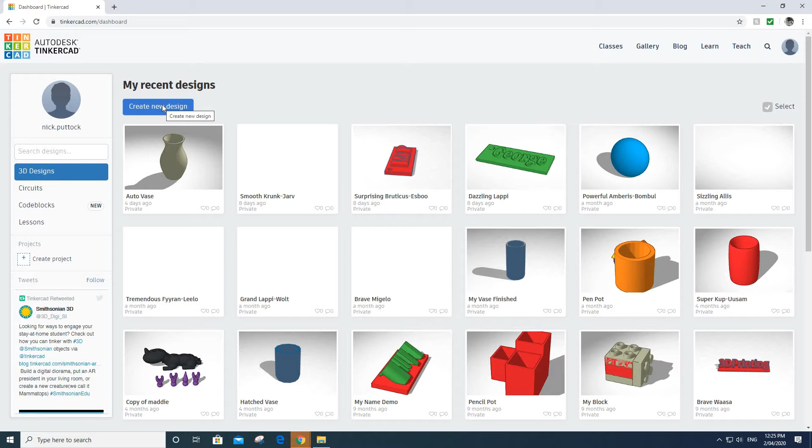So I'm going to start by clicking on create new design.

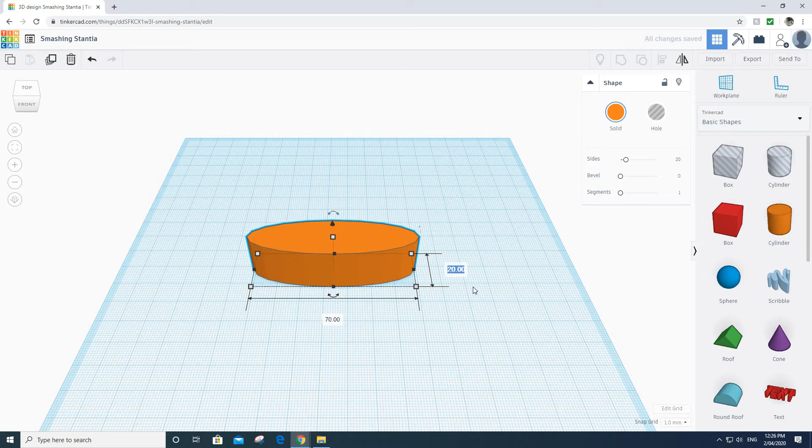Okay, so things get a little bit more tricky today. So what we're going to do is we're going to start by grabbing the cylinder and I'm going to tell it exactly how big I want it to be. So I want it to be 7 centimeters across, so that's 70 on here, 70 millimeters. It looks massive right now, but it'll look okay in a minute, and it'll be 70 that way as well. It's quite angular. Do you remember how we talked about our shapes looking quite angular? So what I'm going to do is I'm going to click up here and give it more sides.

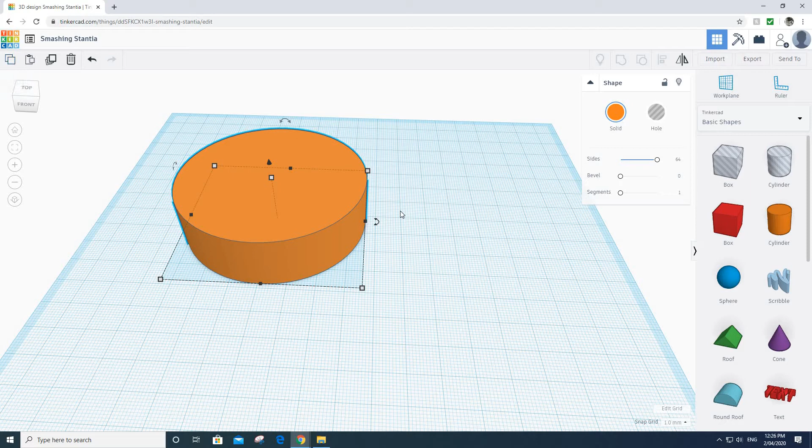Okay, so there it is. It's a little more round. And I'm actually going to use that shape a few times. I'm going to click on that one there, Copy. Okay, and now I can click on Paste, and it should make me an extra copy.

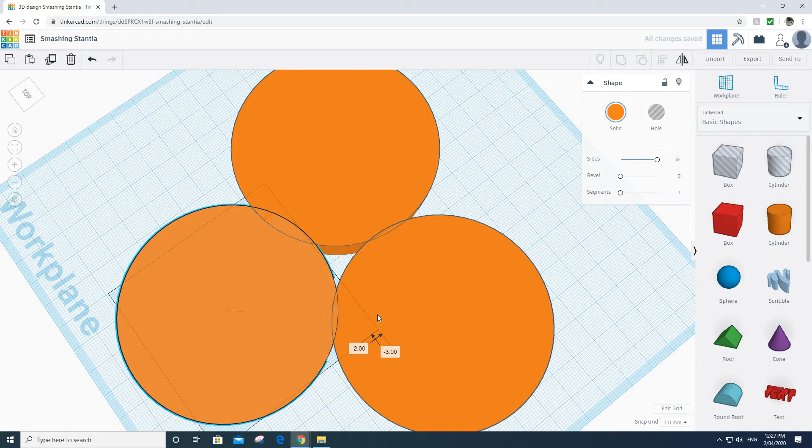Now I'm going to make 3 copies of that. And what I'm going to do is I'm going to make sure they touch, they intersect. I'm just going to do it by eye for now. I could measure it all out and everything, but I'm just going to make sure there's enough of these shapes touching each other that if it was to be printed, they wouldn't completely fall apart, and there should be a bit of a gap in the middle.

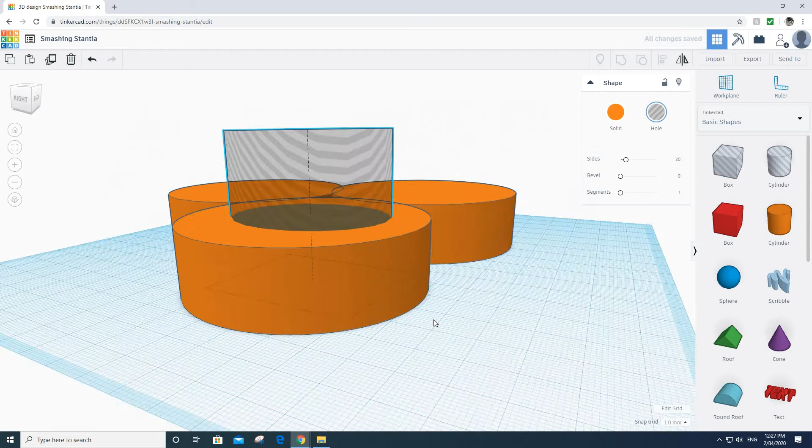And what I'm then going to do is I'm going to grab my air cylinder, so my hole, and make that first up. I'm going to make it a bit taller so we can see it more easily. I'm going to line that up with this cylinder here. I'm actually going to give it lots of sides as well, so it's nice and smooth on the inside. And I'm going to line it up.

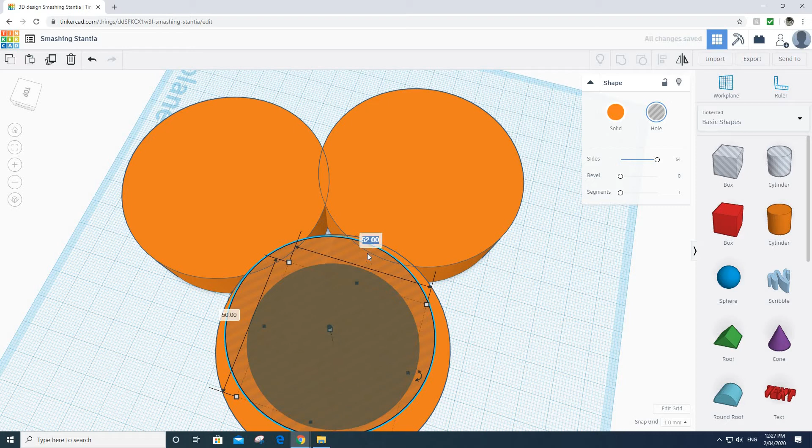So straight away I'm going to select this hole shape and just this circle, so select just those two. Oh, actually that circle is not very circular, is it? I should probably give it some dimensions first. So if it was 70 millimeters wide before, I'm going to make it 50 millimeters wide inside.

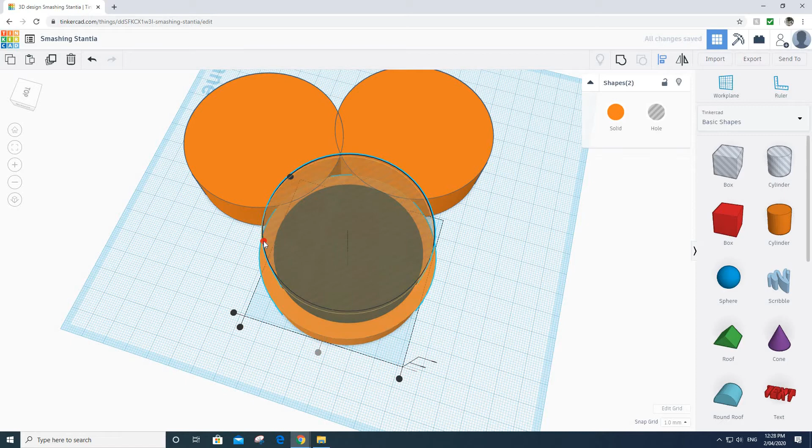Okay, so now what I'm going to do is I'm going to select those two things, and I'm going to align them. I'm going to align them to the center. So it's now put that hole exactly in the center of that circle. I don't want it wonky off to the side.

But the problem is with this, the actual hole is going to cut all the way through that orange circle there. Okay, so what I'm going to do is I'm actually going to have to click on the hole, click off it, and I'm going to click on the whole air space.

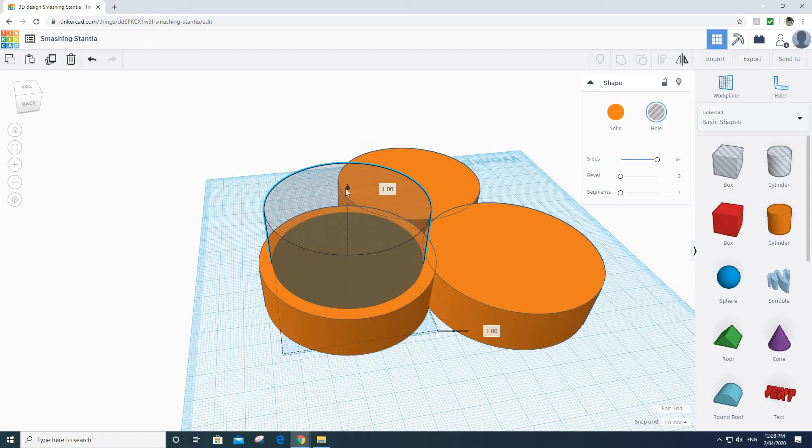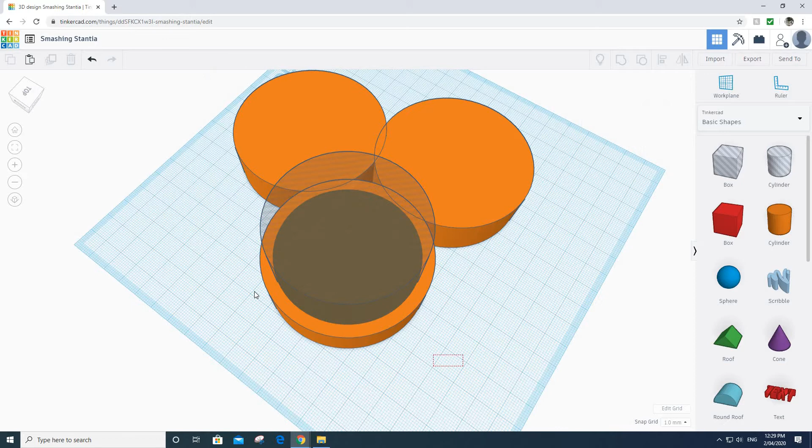I'm going to lift it up by 3 millimeters. That means it's now going to have maybe a 3 millimeter piece of plastic at the bottom of that hole. So it's not going to cut all the way through. It's going to leave like a section, this bit here at the bottom, so that my pencils don't fall all the way through. So I'm actually going to go ahead straight away now and group those two things together. Group, and it just sometimes takes a minute, but it's going to cut that out.

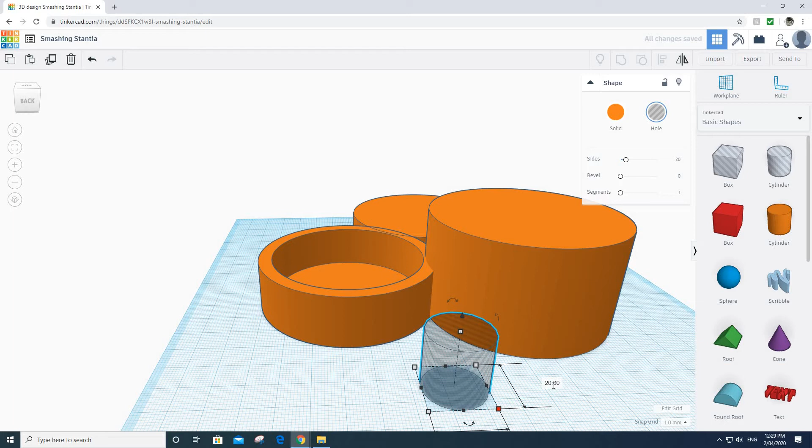Alright, next. This time I'm going to actually make, how tall was this? We said that was 20. I'm going to make this one 40 tall, so it's going to be higher on this one. And then I'm going to get my cylinder again, and we decided before that it was going to be 60 millimeters wide, 60 millimeters long, and obviously it can be as tall as I like.

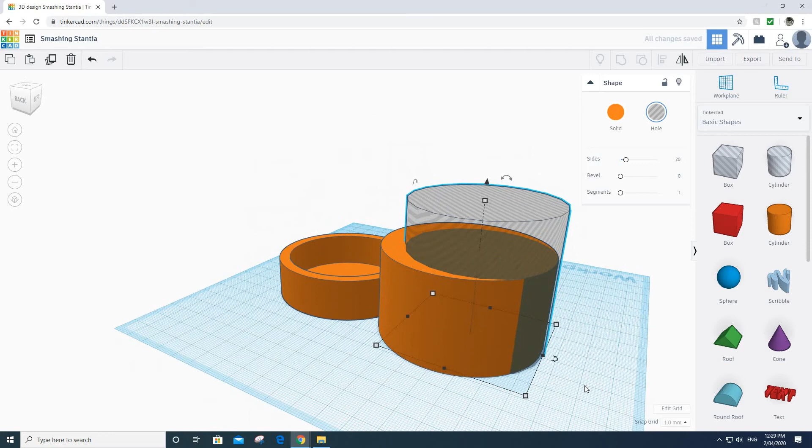It can be as tall as I want it to be. I just have to make sure that it's touching the build plate, otherwise it's going to mess it up for me. I'm going to put it kind of roughly in the middle of the next one. It doesn't matter - look, if I put it over here by accident off to the side, it doesn't really matter, because what I can do is I select them both, I click Align, and it will automatically line them up for me. Okay, so it's done that.

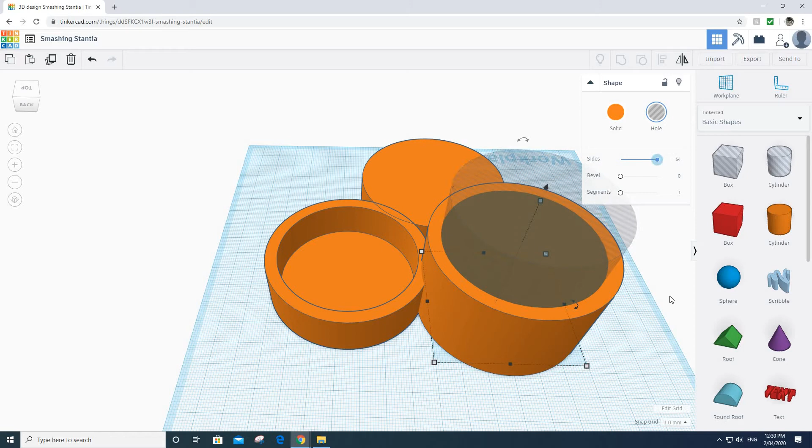This hole looks like it might be a bit angular, so I'm going to select the hole and make that 64 sides, which should smooth it out a little on the inside. But if I'm not careful, you see this funny greyed area, which means my hole that I cut is going to go all the way through.

The last one I lifted up by 3 mils, so I'm going to do that again. Look, I lifted it up, and now it's 3 mils. The gap at the bottom is 3 millimeters. Okay, click those two — don't click everything, because that's going to group them all together, and I don't want to do that yet.

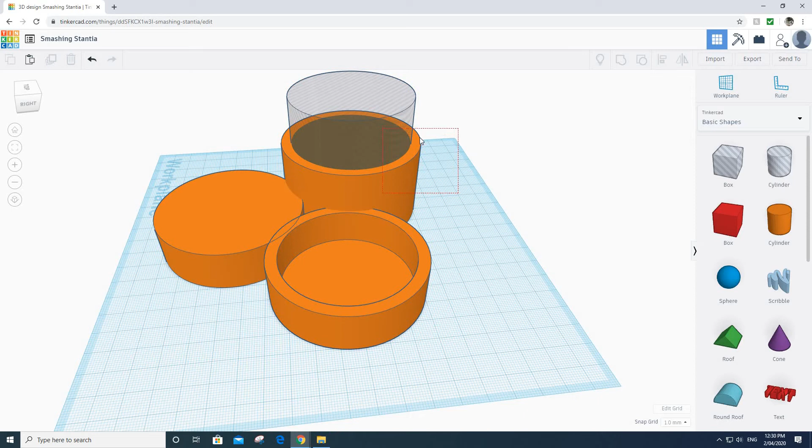I'm just going to click those two and click on group. That one's built. The next thing I'm going to do is click on this one. That one was 20 millimeters high, which is 2 centimeters, not really high. This one was 4 centimeters high, and this one I'm going to make...

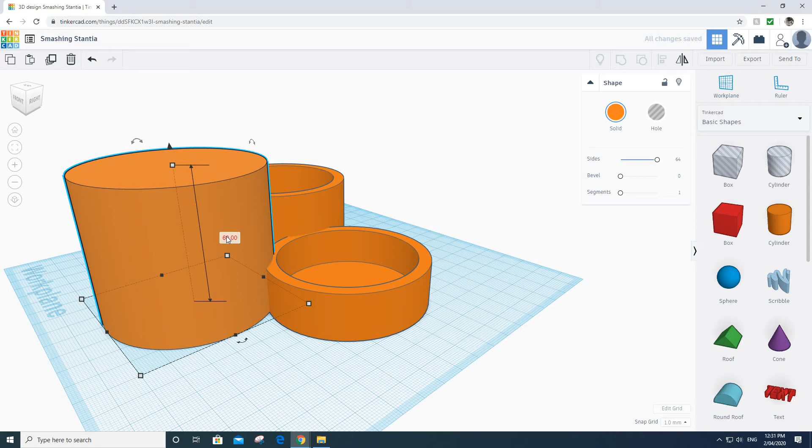I'm just going to undo that — that's my mistake. Click on the white one there to lift up the height of your shape. This one I'm going to make 60. I can either drag it like this and watch the numbers go up to 60, there it is, or I can click in that box and just type 60. It depends what's going to work for you.

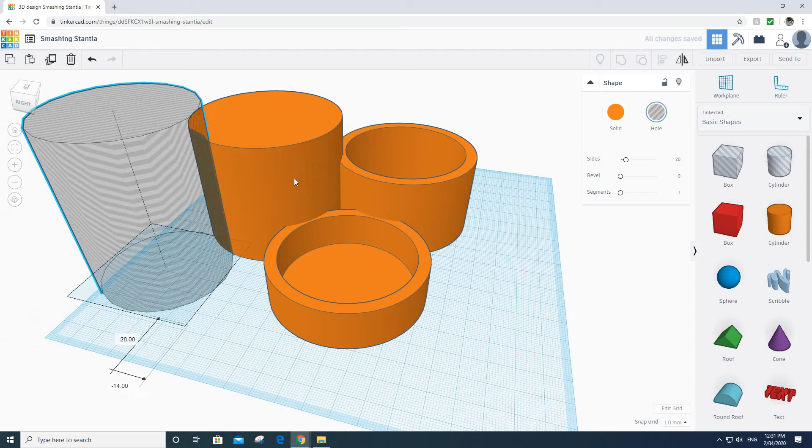Again, last one, I'm going to make my cylinder 60 wide, 60 long, and I'm going to make it really tall — at least 60 tall so that it sticks out the top. Otherwise, there's not going to be an opening at the top of the pencil pot.

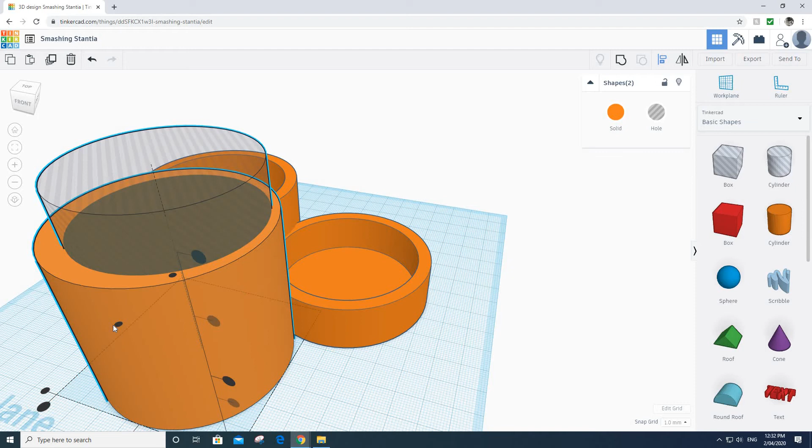Now, just while I remember, I'm going to make all the sides really smooth, and I'm going to align those two shapes to each other. So there's both of them selected — that was just done with a click and a drag for those two shapes, the hole and this taller cylinder. Now I'm going to click on align, which aligns that one and that one. Then I should be able to just group those two together.

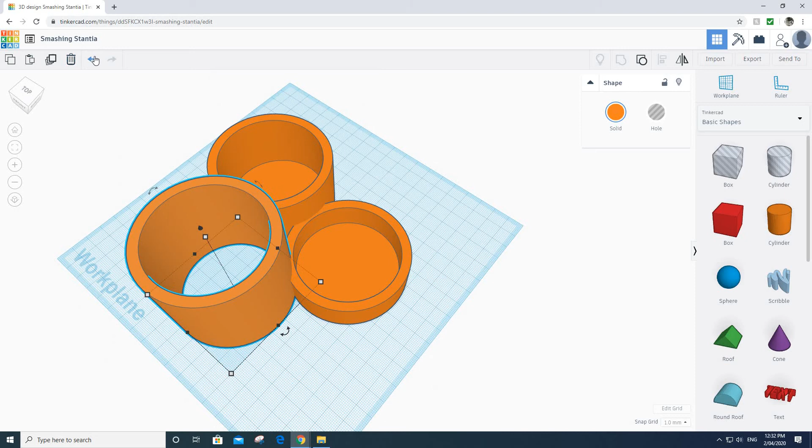Oh, what did I forget to do? When I cut that one, it cut all the way through — I forgot to lift it off the work plane. That's okay, I can problem solve that. I'll press undo, and what I actually need to do is lift that thin air space up 3 millimeters, like that one and like the other one. Now I should be good to go.

Select them both, group. Okay, so there's my pencil pot. Now that looks pretty good, I'm happy with that.

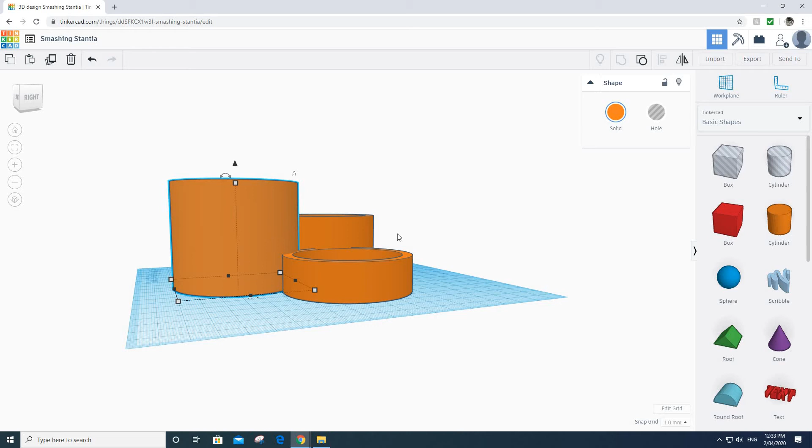But the problem is, this whole pencil pot is only 6 centimeters high, which isn't really tall enough to hold any pencils. So if I group the whole thing together, that's going to link them — at the moment I can move each of these separately, and I don't want to be able to do that. If I select them all and group them together, it's now one object, so when I make this one object taller, it's going to make them all taller.

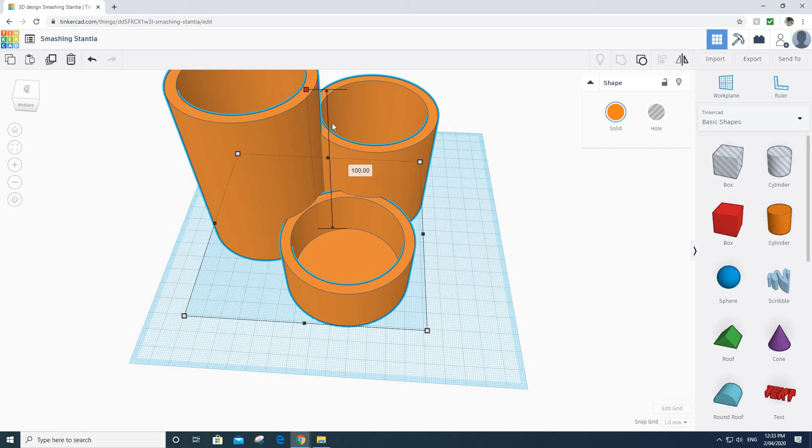So the number given here, this 100 number, that's 10 centimeters — 100 millimeters is 10 centimeters, meaning from the bottom to the very tallest part of my shape is 10 centimeters tall. That's getting into the sort of height of a pencil pot. So I'm actually going to go for 120.

Which means tall pencils can go here, small pencils can go there, and maybe things like pencil sharpeners or whatever could go in this one just here. Okay, so I'm pretty happy with that.

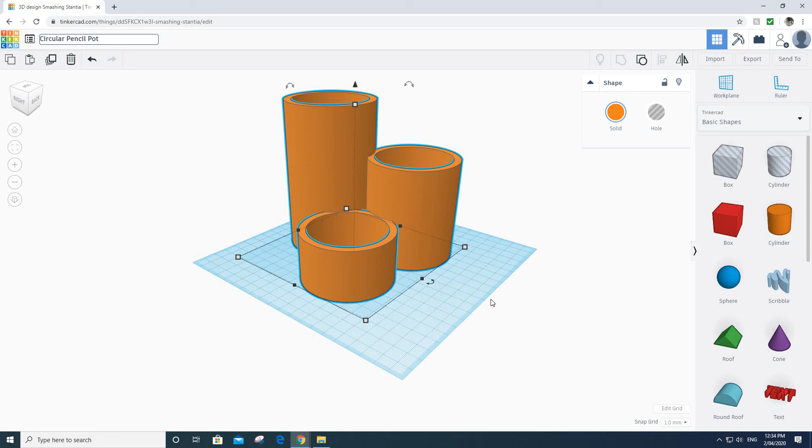Oh, I need to give it a name. Smashing Santia, or Stantia, is not what I'm going to call it — I'm going to call it circular pencil pot. Actually, I think I might have forgotten to name my last model in part 2, but that's okay. Just try to make sure you remember to give it a name if you can.

Okay, have a go at doing something similar. It doesn't matter to me if you use circles, triangles, or these hexagon polygons. If you use this one, one of the fun things is you can actually adjust the number of sides — by default it comes with 6 sides, but you could make that an octagon if you wanted by setting the number of sides to 8. You can play around with that idea for yourself. Okay, great, have a go.